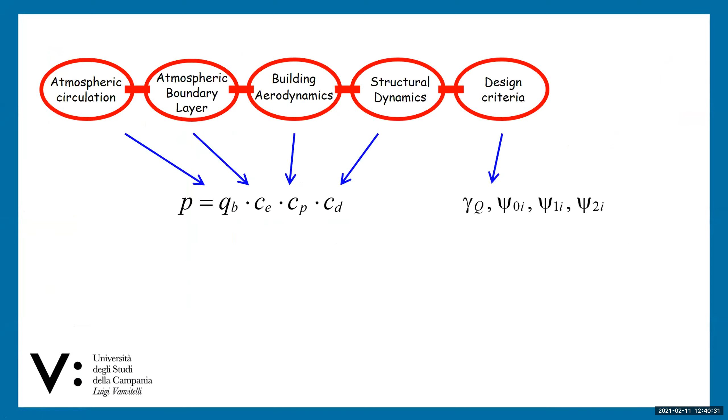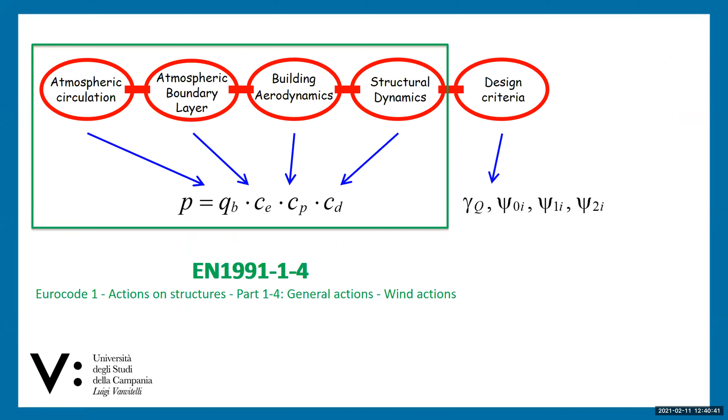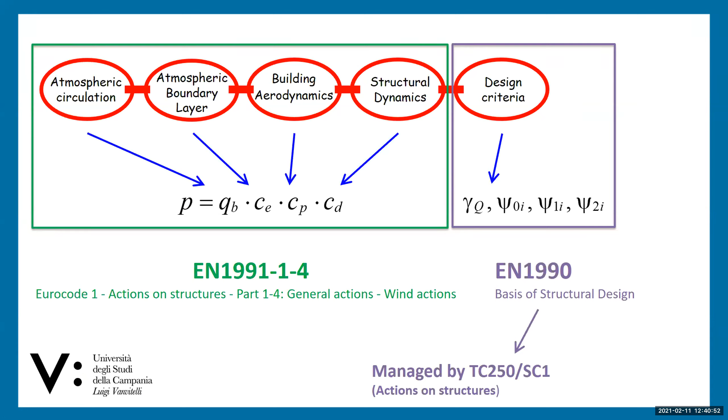Sven Dole clearly pointed out how we can relate the equation of loading from a code to the wind loading chain of Alan Davenport. He covered the part of the wind loading chain that is the equation giving rise to the wind load. What remains for me in the little time I have is this part of the wind loading chain: the calibration of the code factors, which is currently managed by CEN TC250 SC1. Within that, a project team was appointed that had the honor to lead on the interdependence of climatic actions.

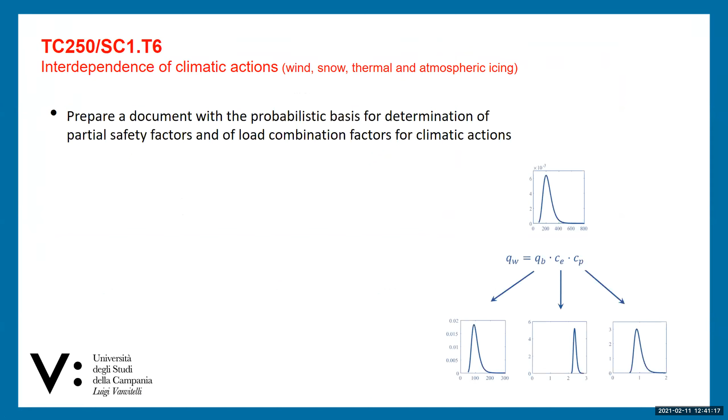We had two tasks to fulfill. The first was to prepare a document with a probabilistic basis for determining partial safety factors and load combination factors for climatic actions — wind, snow, thermal actions, and atmospheric icing. The other task, a rather simple one, was to prepare European climatic load combination maps, which we did. We prepared two sets of maps: one with values from EN 1990 relevant parts, and the other from the national annexes.

What I will do in the next few minutes is look at what we are doing for our background document on the probabilistic basis for code factors. We have to start with wind velocity or velocity pressures, using a model included in the code, and look more into detail on how the probabilistic approach is used to evaluate wind velocities or velocity pressure.

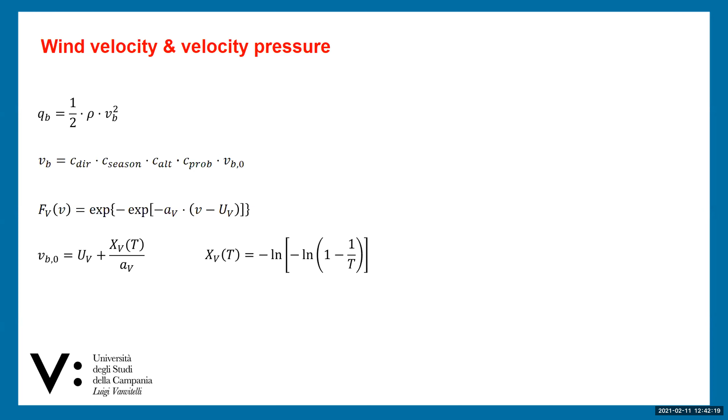We assume wind velocity follows an extreme value type 1 distribution, a Gumbel distribution, allowing us to get the relevant wind velocity for a given return period. This is done by fitting the type 1 extreme value distribution, or the penultimate type 1 extreme value distribution, to the available data, using yearly maxima or monthly maxima. We can fit using Gumbel, Gringorten, BLUE, or the method of moments. The result varies very much depending on which method we use to fit the distribution.

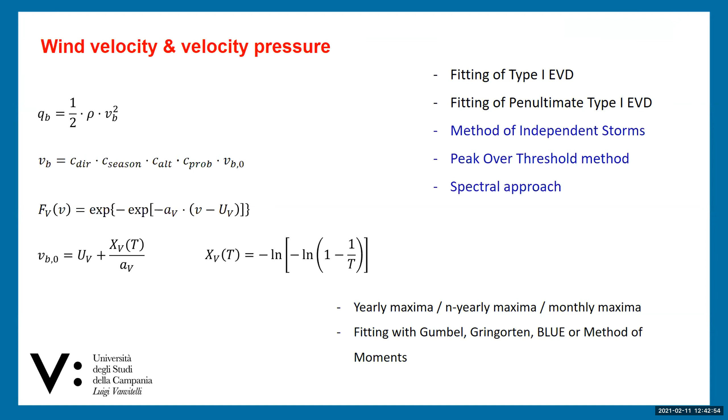This isn't the only method available — we can also use the method of independent storms, the method of peaks over threshold, or the spectral approach. But as I said, the first source of uncertainty comes from the way we fit the distribution.

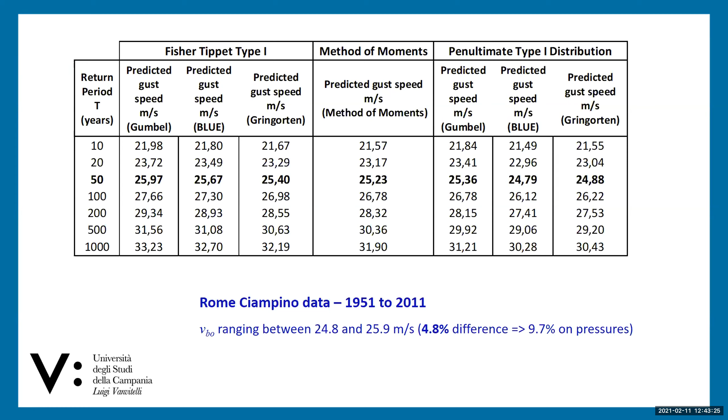I'm showing results from 60 years of data from Ciampino Airport. If we change the fitting method, the reference wind velocity changes from 24.8 meters per second up to 25.9 meters per second — a difference of about 5%, which becomes 10% when looking at velocity pressures. So this is the first source of uncertainty.

Now the second step we have to make is to combine the statistics of the wind velocity pressure with the statistics of the other factors coming into the load equation. The first thing is to combine it with statistics of the coefficient of pressure.

What I'm calling stage one is the procedure of Cook and Mayne, set about 40 years ago, in which fluctuations due to mesometeorological phenomena of the wind velocity are separated from fluctuations due to turbulence. The first are accounted for in the variability of the wind velocity, whereas the latter are accounted for in the variability of the pressure coefficient.

So an assumption has to be made of what is the shape of the distribution for the pressure coefficient. And what we do is choose also here an extreme value type 1 distribution.

But then the question arises of what statistics of CP is to be chosen such that, combined with the 50 years return wind pressure, it provides the 50 years return wind load. And very simply, it is found that the 78th fractile is the right answer to that. So it can be calculated straight from the parameters of the wind load distribution.

But that magically applies only to the UK. In my opinion, if you do calculations from other places around the world, you don't get exactly the same solution. But then there's another aspect, which is that the other factors appearing in the load equation, or their variability, have to be taken into account.

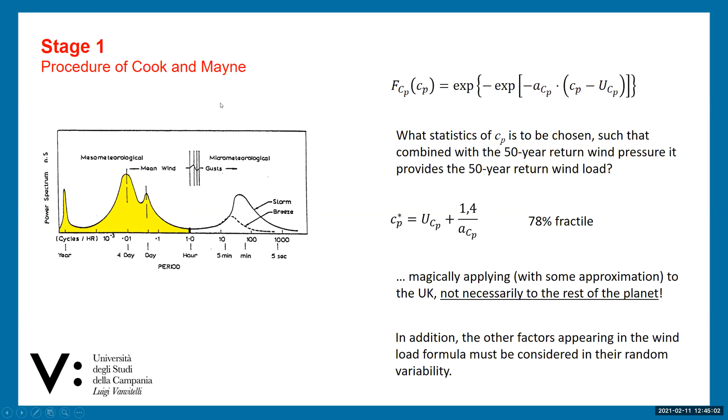So what I'm calling stage 2 here, which we can use, is Monte Carlo simulation. If we make assumptions on the distributions for the different parameters in the load equation, and we have a calibration for the coefficient of variation of this distribution, then we can make a Monte Carlo simulation and get the distribution for the wind load, and use that for calibration of the load factors.

But on the other hand, we notice that if we use crude Monte Carlo simulations, we don't allow for the duration of storms, which is the same thing as not allowing for correlation of events, which again is the same thing as not allowing for the spectral content of the load variation.

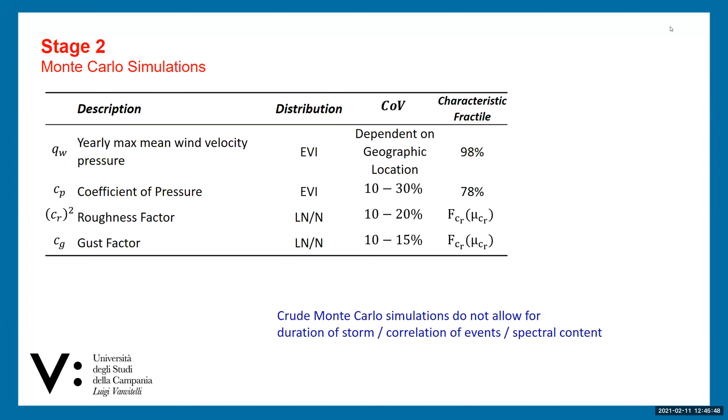So we can move to a further stage, which I will call stage 3, the reliability approach, which is used by codes of practice. In doing this, we have to select the probability of failure and accept the value for the probability of failure, or equivalently, the safety index.

And then we have to select what we call a sensitivity factor, which is the factor separating the partial factor into a component which goes to the load and a component which goes to the resistance of the structure. And then out of that, we can calculate the partial factor.

So just to show you how the way in which we do this affects the final results, I'm showing you an example. We selected a particular location and made the calculation for the ratio between design wind pressure and the characteristic wind pressure, which represents a partial factor on wind pressure. In doing that, we got exactly 1.5, which is the value suggested by the current version of the Eurocode.

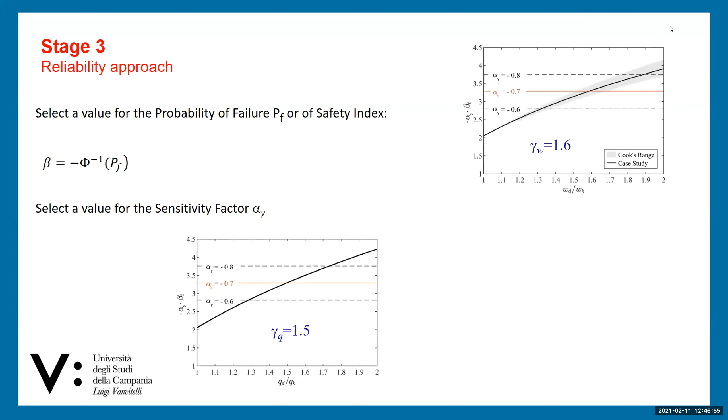Now if we do the same thing but instead of accounting only for the velocity variation, we account also for the variation in the pressure coefficient, using the method of Cook and Mayne, then this partial factor increases from 1.5 to 1.6.

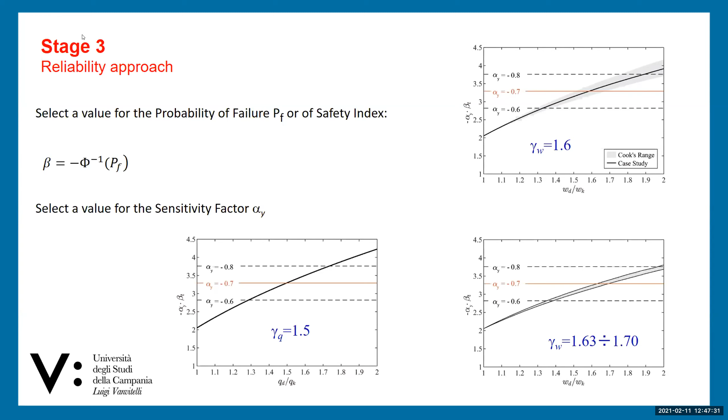Then we like to include also the variation in the other parameters which are in the load equation, which is the gust factor and the approximation of the variation we have with height of the wind velocity. In that case, the factor increases to a range between 1.63 and 1.7, rather larger than the value given by the Eurocode now.

And the third, and I would say final, stage here is looking not at the action but at the effects. So when we look at the effects, we have to combine the effects coming from wind loading with those coming from permanent loads. In doing that, we also need to consider a specific structure, so the results we can get are related to one specific structure.

So the example I'm showing here is a low-rise industrial building, a portal frame. We combine the wind load with the permanent load as a function of the ratio between the characteristic value of the effect of the wind load and the characteristic value of the sum of the effects of wind load and permanent load. And if we do the same exercise I showed before, we end up with a partial factor of 1.65.

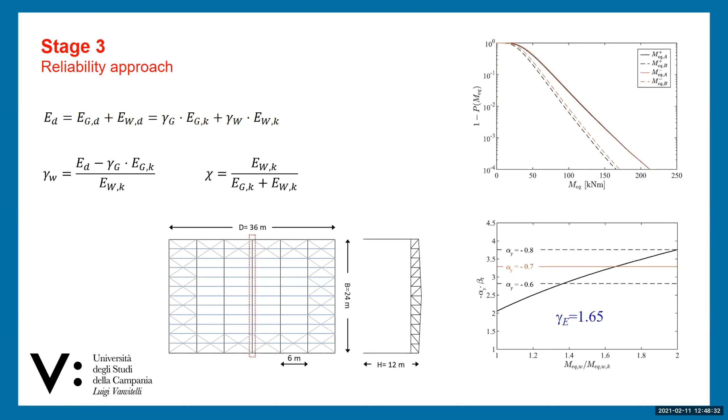So the conclusion I get to in this first part is that we need to be very careful in the way we calibrate the partial factor on loads, because this is very much related to how we model the components that appear in the equation of the wind load, and the effects we're looking at.

Second, and the final aspect we consider is the calibration of the combination factors, which we use when more than one variable load is applied to the structure. The first question we have to answer is: are climatic actions correlated to one another?

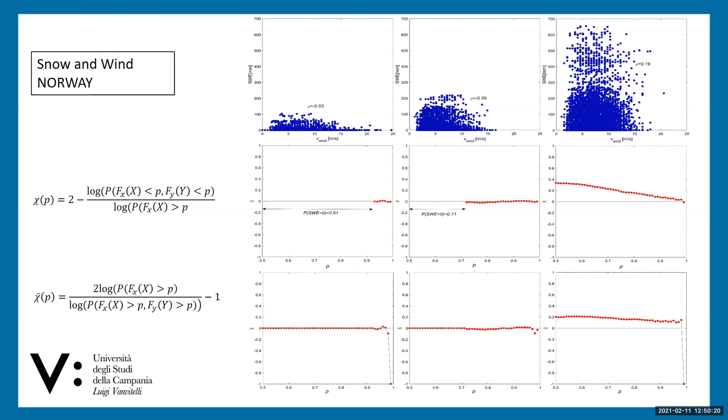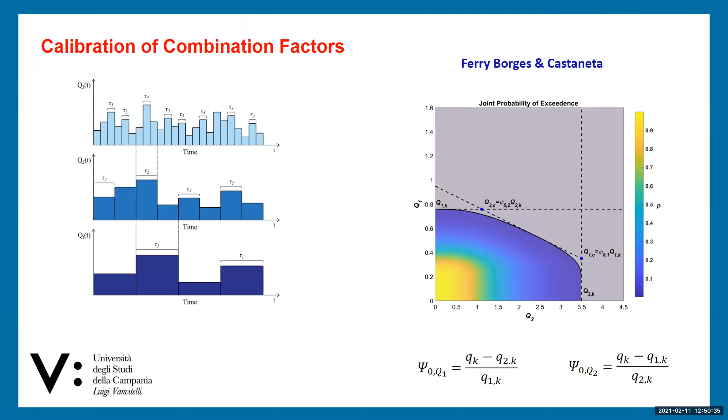Once this is established, we can use the standard approach used in code calibration for combination factors, the approach of Ferry Borges and Castanheta, which assumes that the reference average time for different climatic actions, or actions in general, are multiples of each other.

Then it's possible to establish the joint probability of exceedance of the two loads, set design points for a given value of the probability of exceedance, and calibrate the combination factor as the values that give the same probability of exceedance for the combined loads as for the single load considered alone.

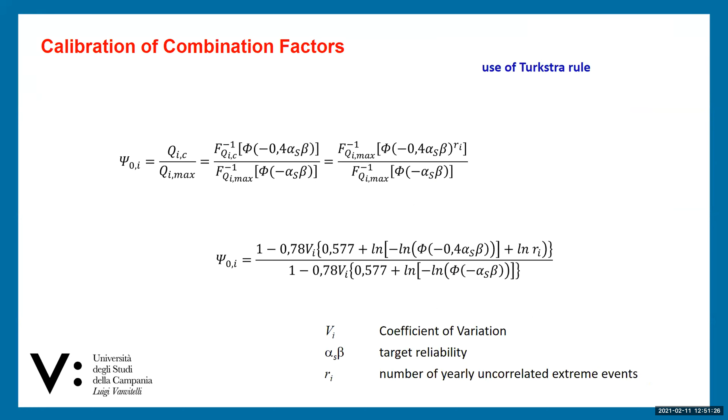Assuming, as we said, that the loads we're combining are not correlated with each other, we can use the Turkstra approach, which simplifies the calculation by looking only at the parameters of the loads to be combined, not the parameters of the main, principal load.

It turns out that the combination factor, or the fundamental combination factor at the ultimate limit state, is a function only of the coefficient of variation of the action to be combined, of the target reliability, and of the number of yearly uncorrelated extreme events. That last parameter, R, is the most complicated one to choose in this calculation.

To conclude, I'd like to show you an example, an exercise we made for Italy. We had data from about 100 meteorological stations in Italy, so we could calculate the scale and shape parameters of both the parent and extreme value distributions of wind velocity.

Out of that, we found that the distribution of the parameters of wind velocity was not the same at all stations. We could establish an empirical CDF of the coefficient of variation for the wind velocity.

As we said, the psi factor is a function of the coefficient of variation of the load, the wind velocity in this case. So we could also establish an empirical CDF for the psi coefficient. This is very nicely fitted by a normal distribution.

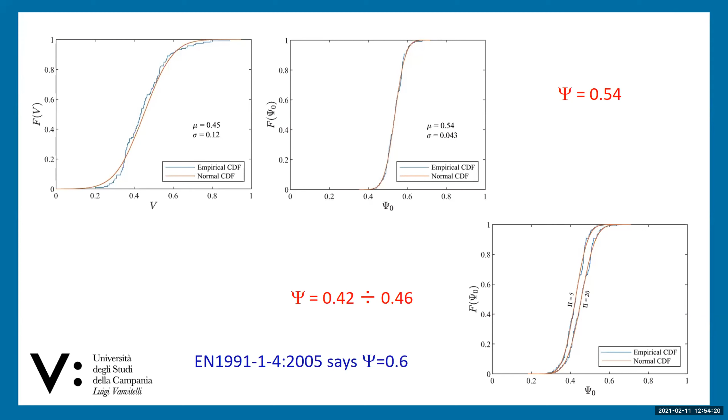Thank you very much. I hope I've been able to say everything in my 10 minutes.

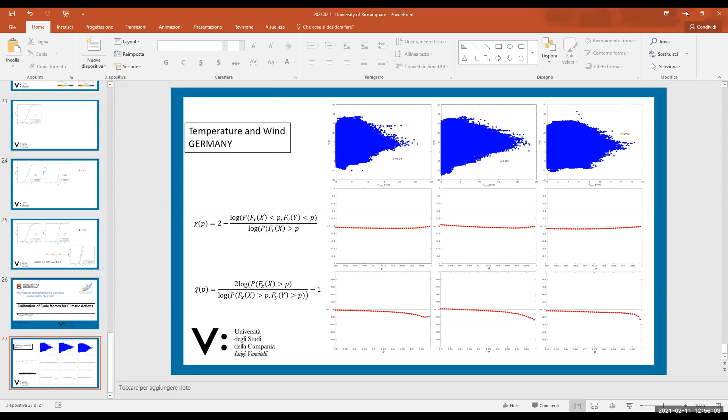Could I ask Francesco, please, to stop sharing, please? Stop sharing the screen. Is it still shared? Sharing. Could you just stop that? No, you're still sharing, I think. Oh. If you could stop the share. I'm trying to do so. Let's see if I can. I'm not sure how to do that. I'm stopping your sharing. Okay, I've done it.

Yeah, thank you. Sorry. Could I ask John, please, to share screen? Hello, John. Nice to see you. Hi, Chris. Good to see you, and thanks for inviting me to speak at this.

This should be my slide on the screen now. It is indeed, and we can see and hear you. With a bit of luck. Yeah, good. Well, again, thank you for inviting me to talk about developments in addressing climate change in design codes. It's something I've been working on for some time. I've got some general material in this set of slides and some specific to do with wind engineering.

As we know, there are lots of standards bodies in the world, with global impact and international standards, like the International Electrotechnical Commission. In Europe, we've got CEN and CENELEC, and we've got national standards bodies - I've got a list of a few there, not meant to be comprehensive, just examples of people I know and work with. We talk sometimes about horizontal standards, topic-based ones that work across different sectors, and sometimes vertical standards, which can be sector specific - infrastructure could be one of those sectors. There are also different types of standards: management system standards like ISO 9001 on quality management systems, maybe less well known is 14001 on environmental management systems, and then things like test methods and technical specifications, such as the structural Eurocodes.

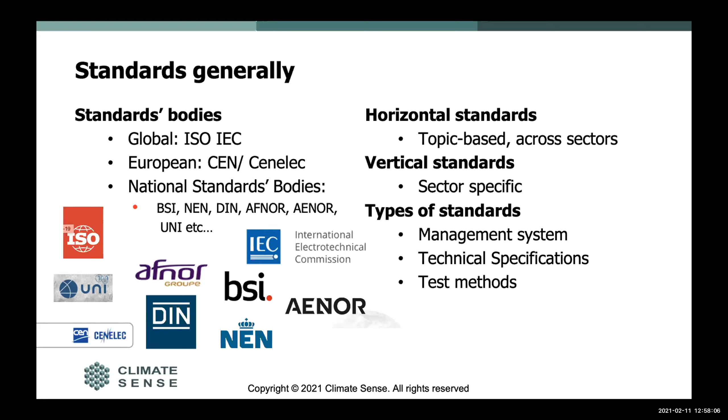Resilience standards, I'm thinking of resilience, I'm thinking of climate change adaptation. This is just an illustrative list of some work I did a few months ago for the Asian Development Bank.

At the top left, you've got horizontal standards on adaptation - that's 14090, the one I chaired the working group to develop, and risk management, crisis management of water utilities. On the right-hand side, you've got sector-specific standards for rail, waterways and ports, wastewater, energy, and so on, and in between a mix of different things like guidelines for planning, survival,

urban planning, seismic design, and so on. So this is a list of all the sorts of standards that are around in terms of maybe high-level guidelines.

What we're missing, I think, is some of the challenges that come from looking at long life standards like the structural Eurocodes, and also the use of standards. Organizations might use standards only if they have to. Legislation in Europe - we've got laws that say safety of structures is aligned with the structural Eurocodes. So we've got that in Europe, and the structural Eurocodes are used all over the globe.

Some work I did a couple of years ago in Singapore - I asked a question about this new metro station, what design codes, and they said the structural Eurocodes. Similarly, a couple of years ago in India, they're building a new railway for freight, and there are four segments to it, but the northeast one that I looked at was about 800 kilometers long, and it was being designed and built to the structural Eurocodes.

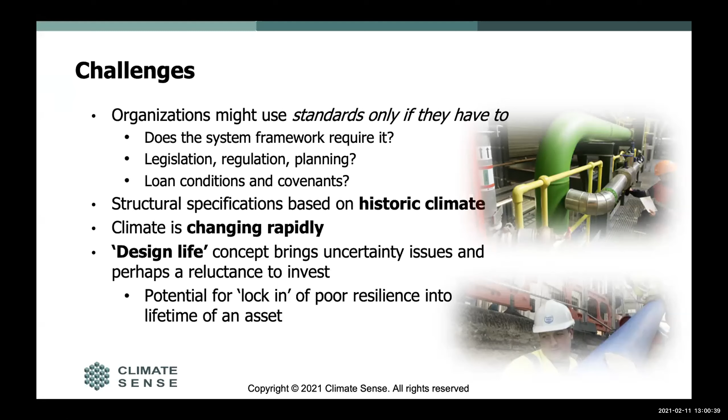Things are changing rapidly, and the design life concept that's built into our design codes brings uncertainty issues, and perhaps a reluctance to invest. How can you design something that's got a 50-year or 100-year design life if the future climate is uncertain and we're designing them with thermal or wind or snow loading from maybe 1961 to 1990 climate, which has already changed? So there's potential for locking in poor resilience into the lifetime of an asset.

However, there's a lot of developments, and I very much sometimes talk about the Paris Agreement, the United Nations Sustainable Development Goals, and how they pushed governments across the globe to think about reducing greenhouse gas emissions. But also in the Paris Agreement, Article 7, we talk about adaptation to climate change, and that was a major driver in the UK and China pushing ISO 14090, which was published in the summer of 2019.

But in Europe, a mandate from the Commission to CEN M526 was in support of the strategy on adapting to climate change. The mandate to CEN was contracted to the Netherlands Standards Organization, NEN, and I'm a subcontractor in that work. The mandate and the work that's going on is aiming to include climate change adaptation in standards with tailored guidance for standards writers, which is in draft just now.

A lot of it is wrapped into a proposal for a CEN technical report, which, as some of you may know, is a low-level standard that will talk about how to incorporate climate data into standards as you redraft them or go through the review or new drafting process. TC250, the technical committee in CEN that looks at the structural Eurocodes, is working on the next generation Eurocodes, so there's an opportunity there as well.

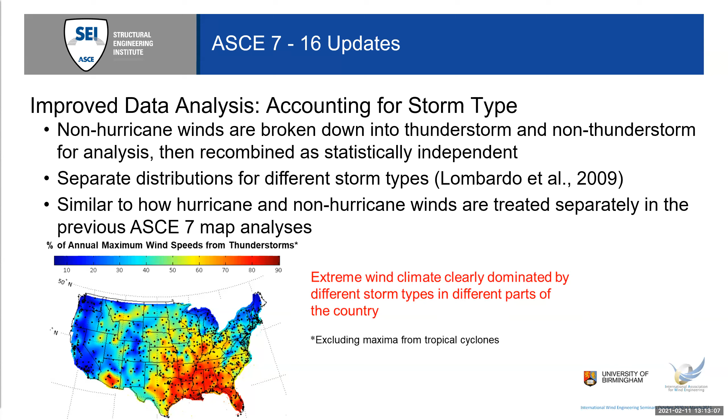What I've shown on the bottom left there is how much thunderstorms affect the map. Of course, this doesn't include our hurricane contours, which we'll add back into the map.

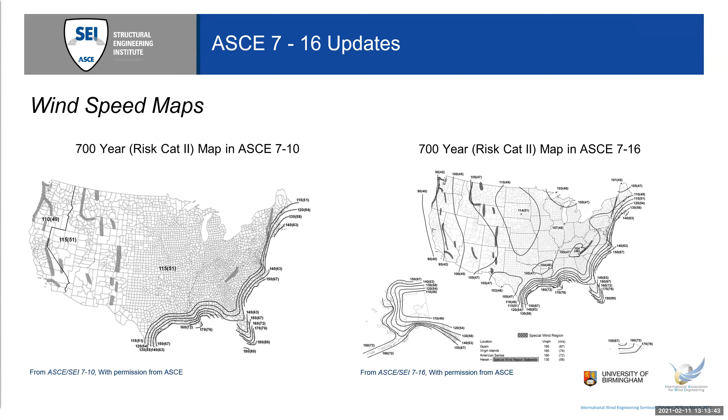Also, a big change for us was our roof pressure coefficients on low-rise buildings. Most of our roof pressure coefficients, up until 2016, were based upon work done in the 70s at University of Western Ontario, now called Western University in Canada. Dr. Greg Kopp did all of this work, where he looked at the different pressure coefficients we have for the different roof zones.

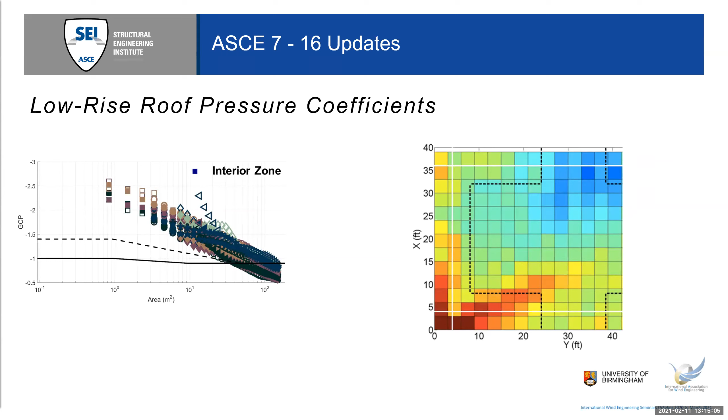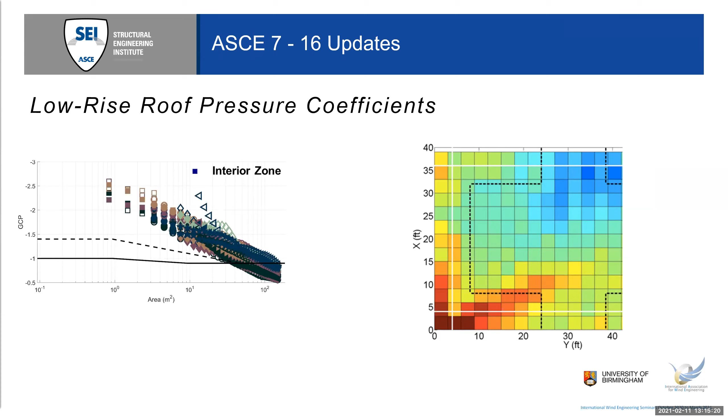As we got to the interior, it actually got a little bit worse. The plot on the right shows the white lines, which I know are hard to see - hopefully you can see my mouse - that used to be our zoning for the distribution of the different roof pressure zones. They were not good. What Greg's research showed is that our zoning needed to be improved as well.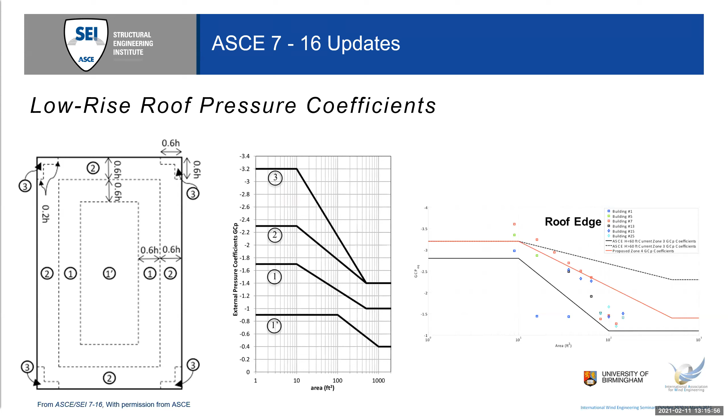So from that, we did increase our roof pressure coefficients. We went to the mean values as shown on the right and zoned our roofs differently. This is for the flat roof conditions. We also did the same for the sloped roof conditions and included the new roof pressure coefficients. Much higher roof pressures on the roof if you use the same wind speed as before - of course, our wind speeds went down quite a little bit, so that helped.

In 7-16, one of the things - you'd think that for all the years we designed canopies on buildings, we would have some provisions in our standard on those. We had not, until 7-16, where we have some provisions for canopies. This is being actually even updated again in our next round for ASCE 7-22, which is almost ready for publication.

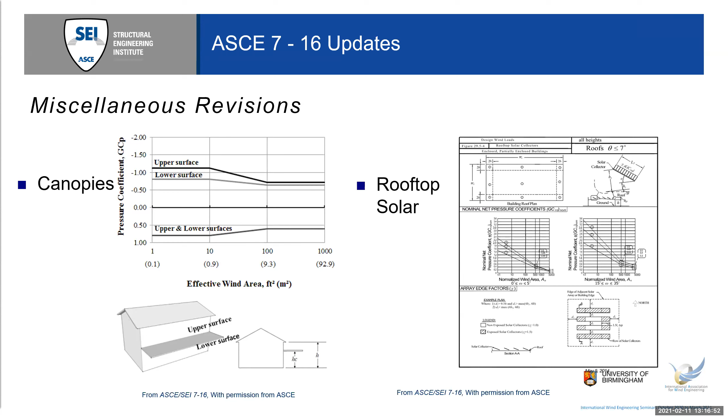The one thing we also added was for wind pressures on solar panels. That's quite an exploding industry here in the United States, and so they needed some guidance on rooftop solar and what type of roof pressures they would have on those solar panels. So we've added that into 7-16. Like I said, a very exploding industry in the United States.

Now I want to talk just on a couple of slides about 7-22, which is just finishing up and should be ready by the end of the year for publication. The biggest addition to 7-22 is in the tornado realm. We were adding tornadoes into our standard, which is the first time we've ever had them.

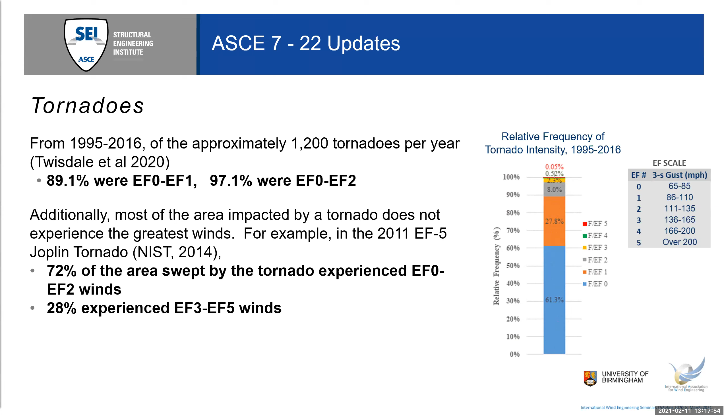I'm not sure about Australia - they might be the only other standard that has tornadoes within it. You can see we have about 1,200 tornadoes per year in the US, but the majority of them are fairly in the low EF0 or EF1 range. Almost 98%, 97% of them, are in the EF0 to EF2 range. So we look at them - we don't get a lot of impact from the major ones. There's a very minor number of those each year, but when they do occur, they are devastating.

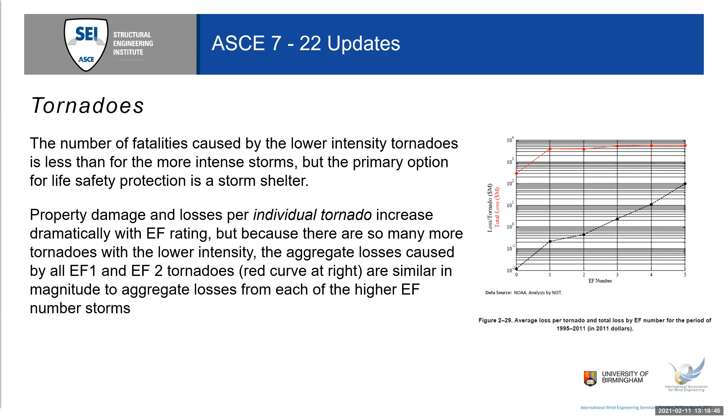There are a number of fatalities that occur within each of those tornadoes. I know this graph is hard to look at, but you can see the number of EF tornadoes per year in the plots, and how much damage occurs is shown by the red line on the top. By the time we get past EF1, the amount of damage we receive to our structures has fairly almost reached its max after the EF1 category. So we want to make sure that we account for tornadoes properly, and we have new tornado maps that will be included in 7-22.

For 7-28, something we're starting right now, Greg Kopp is doing research for us to improve those 40-year-old values on a series of buildings. He's done 66 buildings so far, mainly with low sloped roofs, and he's produced studies you can find on ASCE's website. We're looking at a much greater study to continue that work, hopefully get it funded, and include more building shapes, which will greatly improve things. We're trying to cut our two procedures in ASCE 7 down to one, so it's easier for everybody to calculate wind pressures on their buildings.

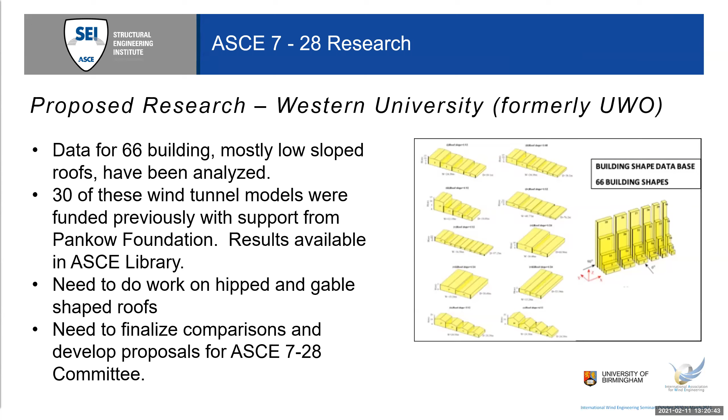Finally, Chris asked me to talk about the pre-standard for performance-based wind design published in 2019 by ASCE. It's starting to look at performance-based wind design, because here in the US we do performance-based seismic design quite regularly. For tall buildings, say on the West Coast with high seismic loads, the wind design for the upper stories, which usually controls on a tall building, was dominating the system requirements for the seismic system down low. We wanted to prevent that interaction, so we developed this performance-based wind design standard to allow a little bit of non-linearity into our building designs. ASCE 7 is a very prescriptive standard, and this will allow much more innovation into our building designs.

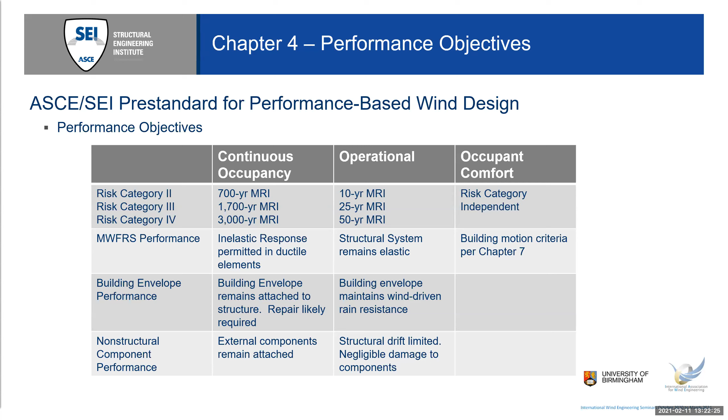We give performance objectives depending on, again, our risk categories. We use continuous occupancy, operational, and occupant comfort as our different performance objectives, and define what is required for each one to exist. There's a flow chart, too hard to read on screen, but we use it to go through the different procedures to check everything: occupancy comfort, operational performance, and continuous occupancy performance objectives, giving guidance to ensure we've satisfied everything in our performance-based design.

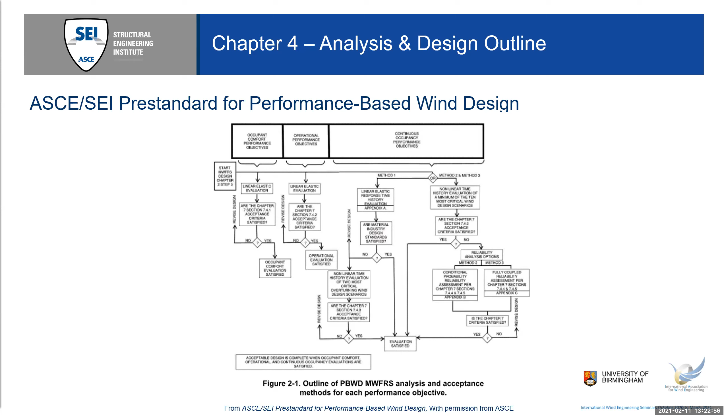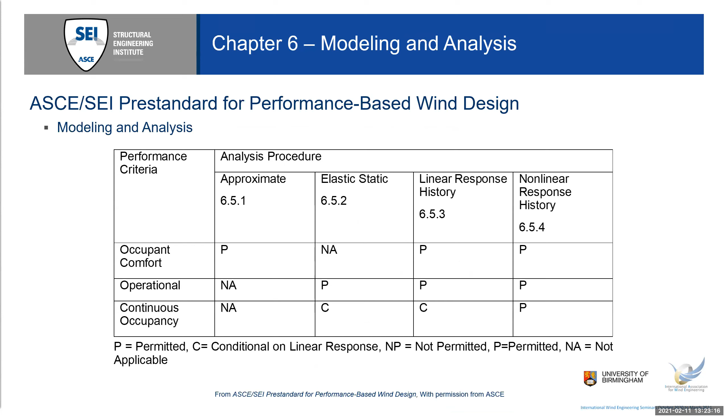This also gives some modeling and analysis guidance, whether you use approximate, elastic, static, linear response history, or nonlinear response history analysis. It tells you which you can use for all the different performance criteria. We've given acceleration limits for occupancy comfort and peak drift limits, which we call DDIs, because we look at deformation damage compatibility in that zone for the different buildings. We use that criteria to select the main wind force resisting system.

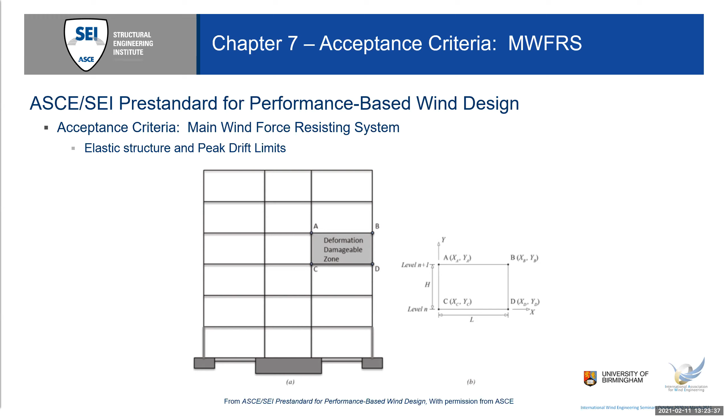Probably one of the largest concerns in the performance of our buildings is the cladding or envelope system. So we go into a lot of detail in our wind performance-based design standard on how to detail and install your envelope systems, and what performance is required for the different objectives. That's where we see most of our building damage in the United States, so we want to make sure that's covered, not just the main wind force resisting systems. With that, I know we sped through a lot very quickly.